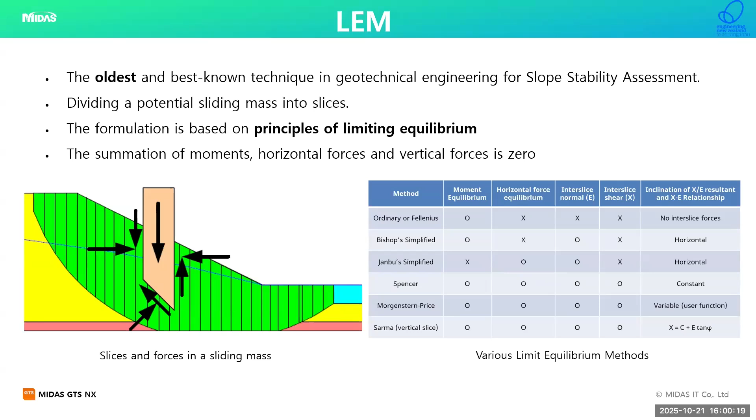So this is very in general about the limit equilibrium approach, and hence it has its own pros and cons. It's very simple to use, and yeah, it has its fallbacks. And when it comes to FEM, all the things that we are dealing with in LEM, wherein the introduction of a slip failure surface or cutting the failure surface into slices, is no longer valid.

Here, they deal with the strength reduction method or the stress analysis method. So here, as you see in the picture at the right bottom, that's the Mohr-Coulomb failure envelope. For the initial state of the soil, the thick line is where you can see the initial Mohr-Coulomb failure surface. So for the in situ stable condition, that's how the failure envelope would look. But as it comes near failure, it touches the Mohr circle where the failure begins.

And that's what this strength reduction method or FEM technique does. It keeps on reducing the strength, c and phi, until it finds a failure surface. That's how simple it is. And that failure surface as a result could be a circular failure surface, a planar failure surface or a wedge failure surface, depending on the topography, the input material properties and so on.

So that's the idea. It has the ability to consider all the equilibrium conditions because it's FEM in nature. Since FEM can consider all the equilibrium conditions, compatibility equations, boundary conditions, and all the constitutive equations, that's the important part here. Most of the LEM approaches or methods are limited to elastic material.

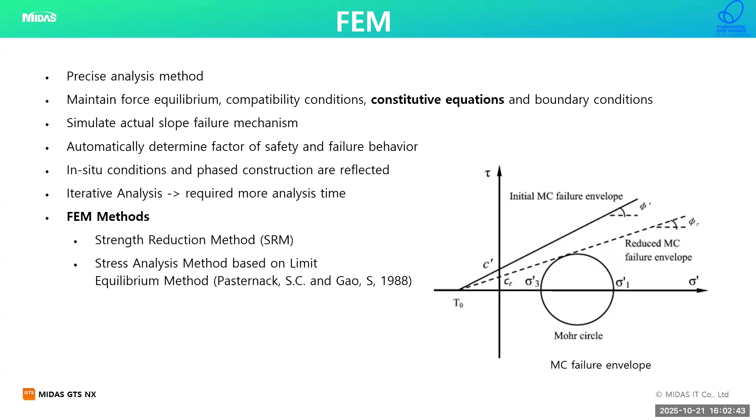So it is a precise method, and it had its own limitations until the previous generation, because it was a highly computationally expensive thing and could only be used for important projects. But all those myths can be overcome. That's what I wanted to talk about as well. The myths are: FEM is too complex, use it only when we have a complex job, and it takes too long for small jobs. But that is not the real case.

Modern tools like GTS NX are user-friendly and intuitive, which makes FEM a go-to tool. There's no need to only consider FEM for complex jobs; you can use it for small jobs to complex jobs as well. And since you consider the boundary conditions that may exist on site, the compatibility equations, and the constitutive equations, it helps to reduce field trials that you may end up having after the initial trial from the LEM methods. So it helps to reduce field trials and errors.

And computation has significantly increased. With the advent of the GPU, as well as multi-core and multi-CPU, computation has significantly advanced over, I would say, the last decade. So FEM can be a go-to tool.

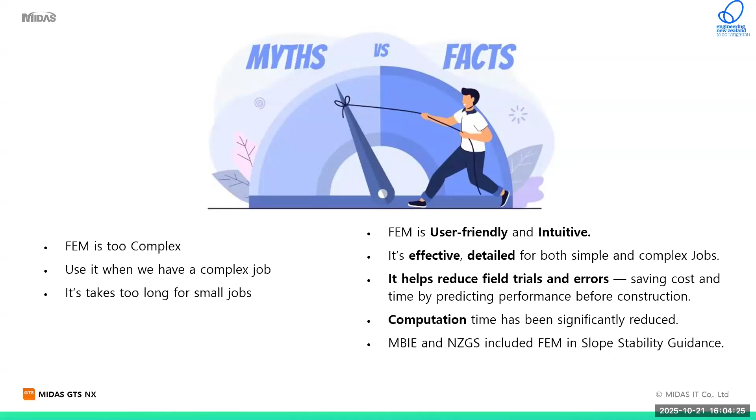And according to MBIE, the Ministry of Business, Innovation and Employment, and NZGS, they have included FEM in their slope stability guidance in the October 2024 draft. So it is set to be released, I guess. So these are some of the myths, and the fact is, you can go with FEM very frequently, for small to complex jobs as well.

I wanted to highlight some limitations that we have with FEM and how we can deal with them in FEM as well. So a comparative study has been made. I created a very simple slope. We have dense soil, the bench is around 45 degrees, cohesion of 30 kilonewton per meter square, and friction angle of 36 degrees. The elastic modulus was wrong over there. The elastic modulus that I considered was 50,000 kPa.

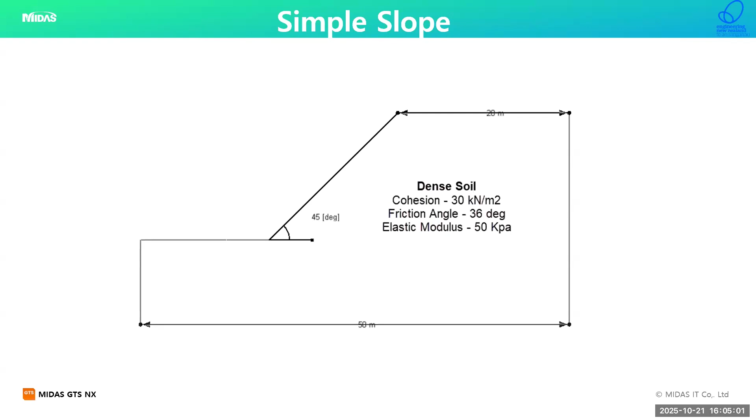So this is the simple slope for the comparative study I created between LEM and FEM. What we found is, in the case of LEM, the factor of safety was 1.78. And nearly the same was found in FEM as well, 1.77. The strength reduction method has been applied.

So the idea is, for a very simple slope and a uniform soil throughout, you would end up having the same failure surface and the same factor of safety, which is not a concern at all, right? Both approaches are giving the same onset.

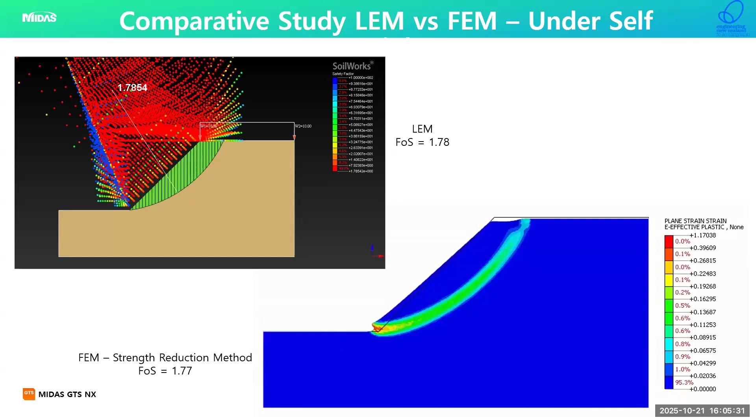And even during earthquake assessment, wherein in this condition I had considered the pseudostatic assessment, the horizontal seismic coefficient as well as vertical seismic coefficient has been provided. For this, I had considered the PGA of the Kaikoura earthquake, so it's 0.22 g, and the horizontal coefficient has been considered as 0.5 times the PGA, which comes to 0.5 times 0.22. And the vertical coefficient was considered as 2/3 of the horizontal coefficient. So that is what was considered in this assessment.

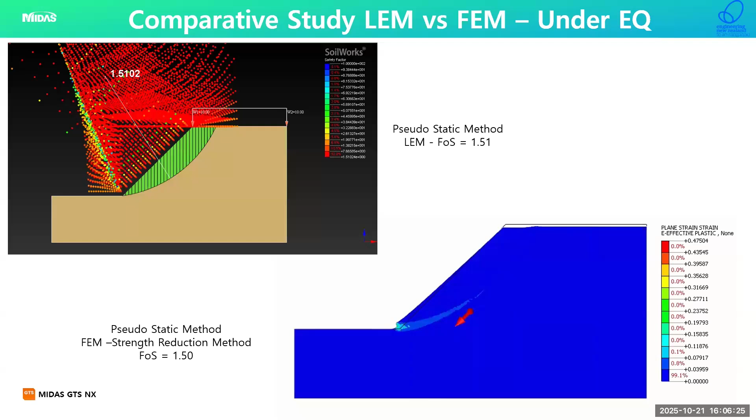And we end up having almost the same result for the limit equilibrium approach as well as the finite element approach, because the soil has been uniform. It is the same thing that you would find in uniform soil and a very simple slope. For a very simple slope, FEM and LEM are providing not exactly the same, but similar results. But what if we have complex slopes with multiple soil strata?

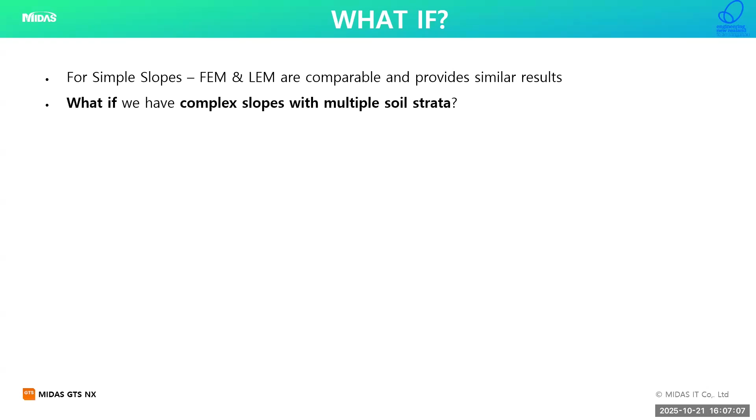Sometimes there might be a very thin layer which is liquefiable in nature, and that is providing a challenge for the engineer who might be dealing with a pile foundation, or with slope stability. So a thin layer could be a very important concern for many engineers. So what if we have very complex slopes with multiple soil strata? Is LEM going to be helpful there? We will check it out.

Also, if you're dealing with soil and fractured rock, it is explicitly needed to model it, or at least to consider the rock mass properties. So is LEM going to be helpful for that? We'll find out.

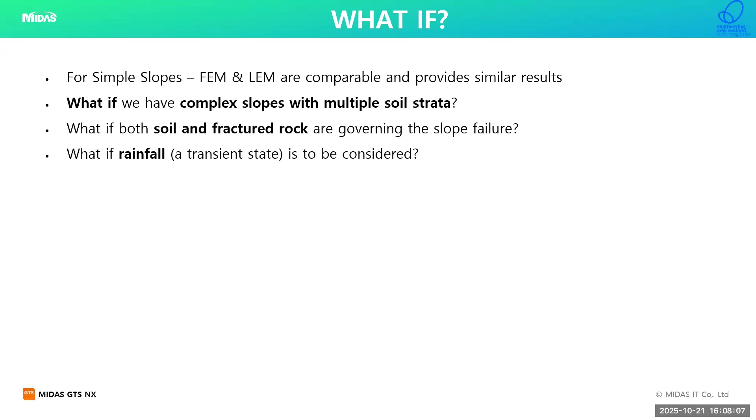And what if rainfall, a transient state, is to be considered? The regular LEM approach considers the steady state condition. Of course, we run the seepage assessment in the transient, but at the end of the day, we take the final steady state condition to the LEM analysis and run the slope stability assessment. But you have a transient condition that needs to be considered at regular intervals. You would like to find the factor of safety because the stress state changes due to the rainfall. So how is it going to affect the stability of the slope? This is one more thing.

And what if you have cyclic movement during the earthquake? During the earthquake, since it's sloping ground, there will be accumulated displacement because of the cyclic movement of the ground. Is it possible to consider in LEM? It's not, because you would not find displacement in any LEM approach. It just provides you the factor of safety and the probable failure surface.

So earthquake-triggered lateral spreading and liquefaction need to be considered as well, right? Lateral spreading and liquefaction are governing things here in New Zealand. So we need to consider FEM for this, because in LEM there are many assumptions, changing the material properties via various empirical equations to understand the effects of lateral spreading and liquefaction in the slope. So again, FEM will be a better approach. We will see what we have in our pockets for considering all these in GTS NX, which is our geotechnical product.

How about multiple shear failures or progressive sequential slip surfaces? In reality, let's say you're dealing with volcanic ash, there is a lot of rainfall, the phreatic surface has increased dramatically and you end up with a fully saturated condition. The failure surface may no longer be circular. There will be sequential failing, one failure surface followed by another and so on, a progressive development of the failure surface, which can never be considered in LEM. That's where FEM can be useful for sure. So let's check some of it.

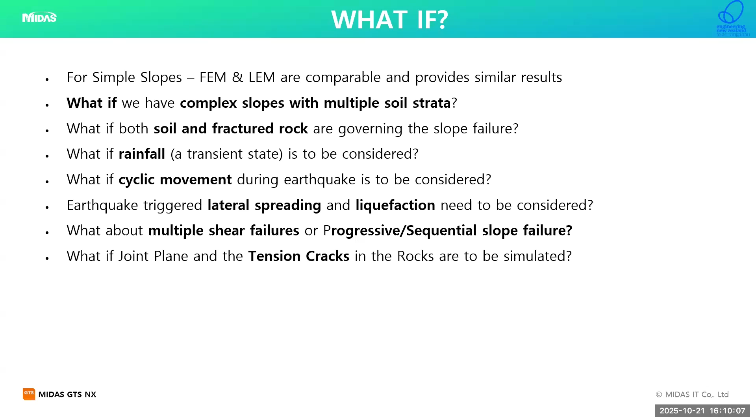And also, what if joint planes and tension cracks in the rocks are to be simulated?

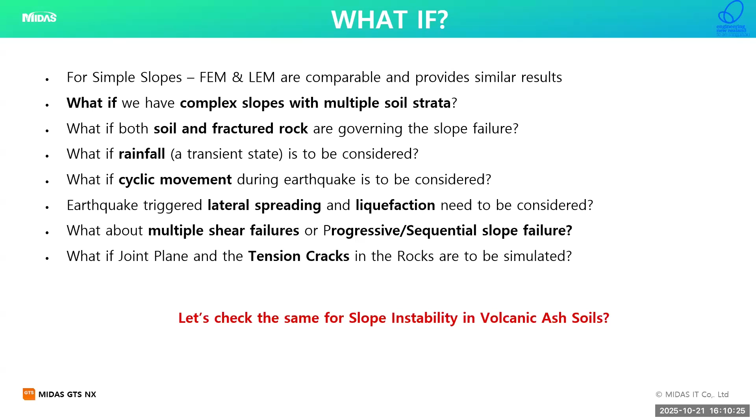Yes, again, FEM could be helpful in this regard. So let's check the same for slope stability assessment in volcanic ash soils. This has been taken from one of the recent projects from one of our clients, so I would like to thank him for providing the data.

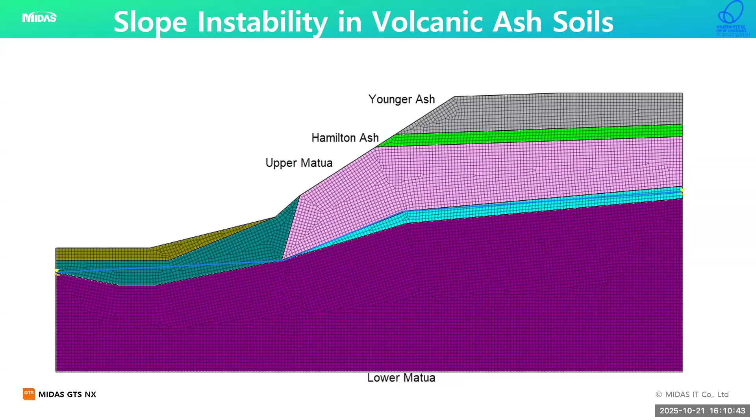So let's talk about this particular slope. We have Younger ash and Hamilton ash, upper Matua, lower Matua, and we have a weak layer in between. This is the soil strata as well as geology that has been considered in this study. If I go with just the self-weight of the soil and find whether the slope is stable or not, I end up finding LEM to be not stable. So you are finding the factor of safety less than 1.

So it is unstable. But of course, when I go with the FEM approach, I end up having a factor of safety of 1.23. This is just under self-weight, no rainfall, just the initial water level condition. And you can see the initial water condition, which is well below the sloping ground.

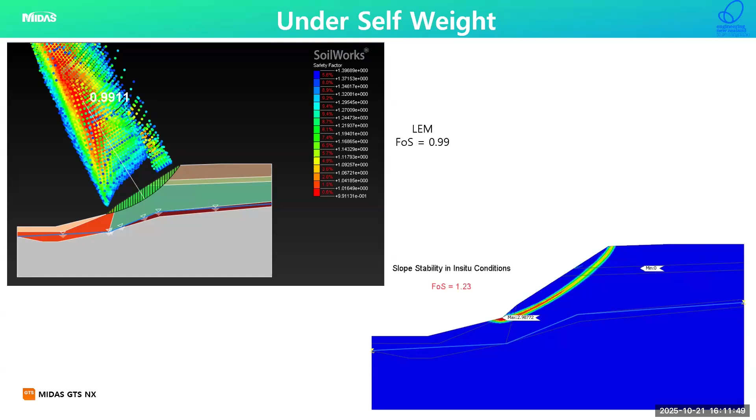Here, there might be a lot of reasons for the increase in the factor of safety. The reason could be consideration of the plastic nature of the soil, or consideration of the iterative scheme of the nonlinear solver in the FEM. There can be many reasons, but the idea is the factor of safety is not the same as the factor of safety that we find from the LEM approach. So we have the factor of safety of 1.23 here for the complex soil strata that we have now.

And how about the rainfall? The interesting thing happens here. Because of the rainfall, the initial water level, which was well below the ground, is now almost reaching the ground over there. In the picture on the left top, you can see that raised water level due to the rainfall. The rainfall was applied on that surface as a boundary condition, so the transient condition was considered in this case.

Due to that, when I run the slope stability assessment, I was able to see multiple failure surfaces getting generated. You can see the failure surface at the toe or the face failure on the top, a circular failure surface generating in the middle, and a bigger failure surface passing through the thin layer over there.

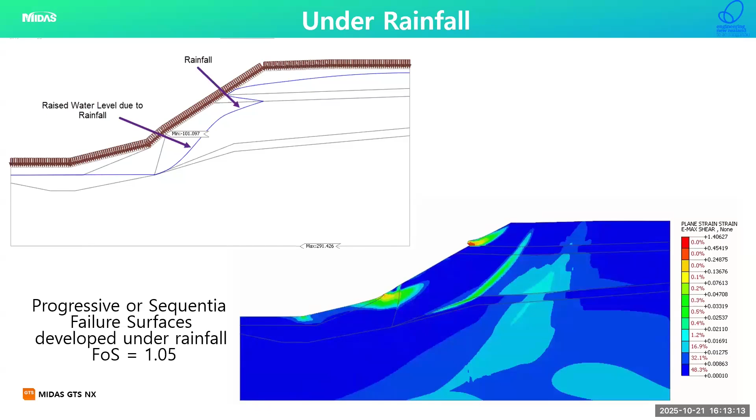All these things can only be considered in FEM, because you are able to find the progressive or sequential failure surfaces which develop due to rainfall, and the factor of safety over here is 1.05. So under self-weight it was 1.23, and under rainfall it is now 1.05. So it has been reduced, which is an important fact for volcanic ash soil, because as and when volcanic ash soil becomes saturated, it starts failing.

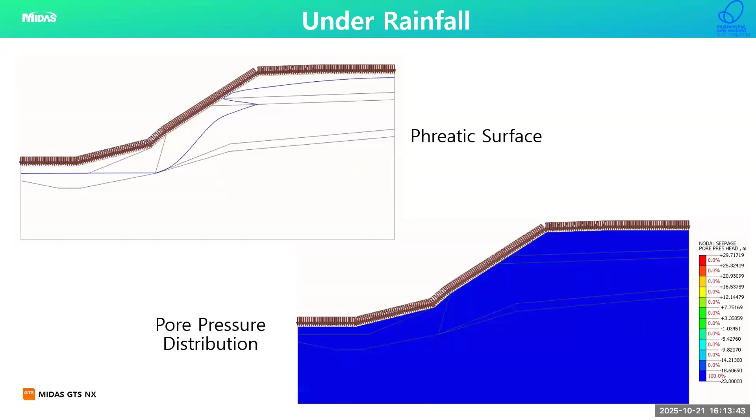And this is the pore pressure distribution that you would find in FEM, because of the seepage assessment and how that seepage is going to affect the stress condition. The increased phreatic surface is on the left top, and the right bottom is the pore pressure distribution. You can see the pore pressure distribution varies significantly throughout the slope because of the topography, rainfall and infiltration properties, permeability, hydraulic conditions, basically.

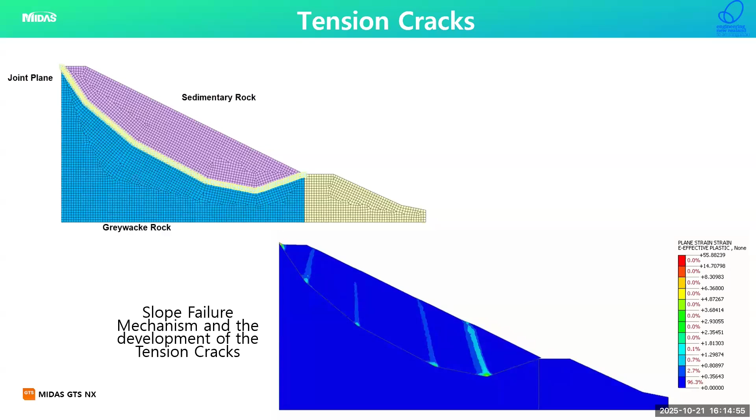So coming to the earthquake, seismicity is a very important part in New Zealand. And most of the times we end up dealing with the pseudostatic method for the slope stability assessment here. So from the pseudostatic assessment of this very simple slope that I had carried out, in LEM we found like 1.5.

But again, sorry, in FEM, considering the strength reduction method for a pseudostatic method, I found the factor of safety to be 1.5. But instead of considering the pseudostatic method, how about considering the time history assessment? That means you're considering the entire ground shaking. So again, New Zealand guidelines ask you to go with shaking whenever it is needed. So ground shaking analysis needs to be considered, again up to the geotechnical engineer's interpretation and discretion.

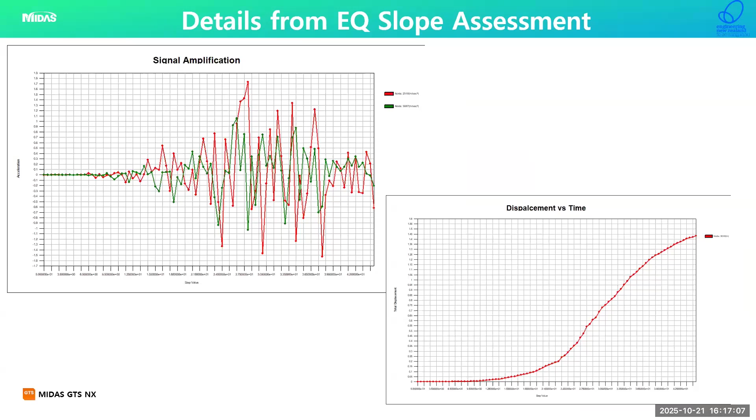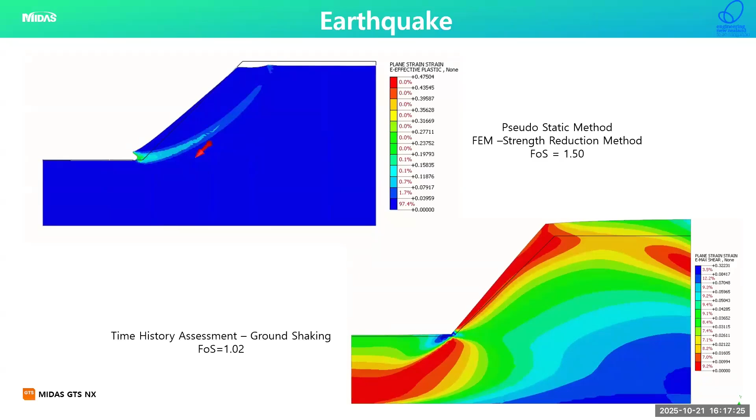And yes, the result is the factor of safety reduced from the pseudostatic assessment of 1.5 to the ground shaking assessment of 1.02. So this is, again, one particular study wherein time history has its own implication, and it is necessary at least to consider for the important structures. So that's in general about the challenges, what kind of failure mechanisms we could find in slope stability, and how FEM can be helpful in that regard.

Now I would like to talk about the solutions that we have in our pockets, which is GTS NX. It could be helpful for both large and small slope stability assessment. So let's see what we got. So initially, as I said, LEM is an important part. And this package, GTS NX, can help you with LEM analysis and FEM analysis, both 2D and 3D, under one platform. This is very important because even if we want to go with FEM, it is always needed to start with LEM, right? So LEM is like an initial step.

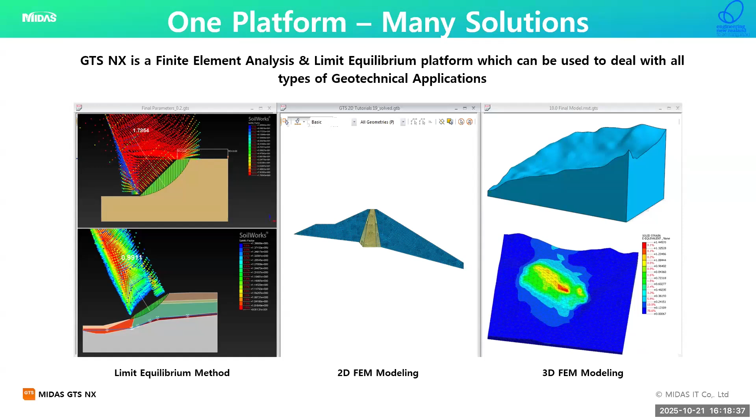You understand the behavior, you understand what the failure surface is, the corresponding factor of safety, and where it is exactly happening. And it is better to assess it with FEM depending on the nature and the requirements of your project. And thereby you will end up doing either 2D FEM or 3D FEM. And you can do everything under one platform. That's the important point. No need to get into different licenses, just one platform, all the approaches.

And the other thing is, in the case of soil, construction sequence is very important. It is the case with every other project, but it's much more important in soil situations because soil is a highly nonlinear material, right? So because it is a highly nonlinear material, as the stress changes, that means as the construction sequence changes, its behavior changes, and thereby the nature of the soil could change from elastic to plastic at any given point of time, depending on loading or unloading situations happening in the site.

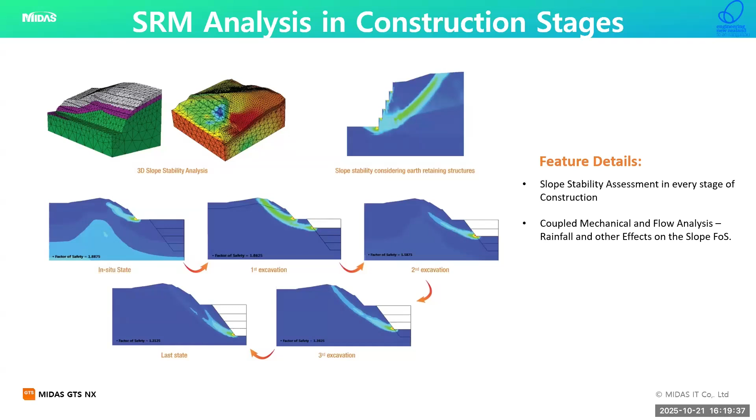So in this software, of course, you can consider all the construction sequencing, and you will be able to find the factors of safety and the failure surface for each and every stage for a particular local assessment or a global assessment. Yeah, this software offers you the SRM for construction sequencing as well, or the slope stability assessment for construction stages.

And the next thing is, now, yeah, we are able to find that the slope is unstable. So how do we go with stabilization? There are various ways, like you can deal with soil nails, rock bolts, piles, or maybe geogrids.

So geogrid, again, has been becoming more abundant for slope stability assessment. So yes, we can provide geogrid in this software. The important thing is, geogrid, being a tension-only element, has to be implemented in such a way that it should be able to only take tension, no compression at all. So instead of modeling the geogrid as elastic material, it should be modeled as a tension-only material, wherein it can only take in tension, and thereby you can see how the factors of safety are changing because of it taking only tension, and you will end up finding what is the axial force coming in the geogrid.

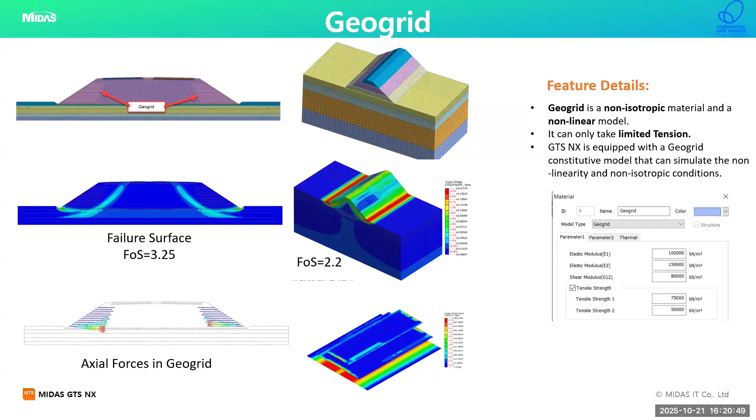So if that axial force, basically the tensile force, is greater than your manufacturer criteria or not, we can end up having an idea, and then we could see, okay, geogrid is not failing or failing. Yes, so we have a geogrid which is a non-isotropic material and tension-only material present in this software for stabilization of the slope, or even MSE walls as well.

And another approach I was talking about initially, right? So the other approach in FEM is the strength analysis method. It's a kind of hybrid method. It was developed in the late 1900s. What happens over here is you're still dealing with the slip circle surface, but instead of considering the Bishop method, Fellenius, Janbu, Morgenstern-Price, and so on, it considers the FEM approach for calculation of driving and resisting forces. So it's one of the interesting approaches and has been getting popular nowadays. And yes, we have had this approach in this software for so long.

So you can still consider the slip circle surface. You can provide the area of interest that you want to analyze, and you can still consider the plasticity nature of the soil because you're dealing with FEM analysis.

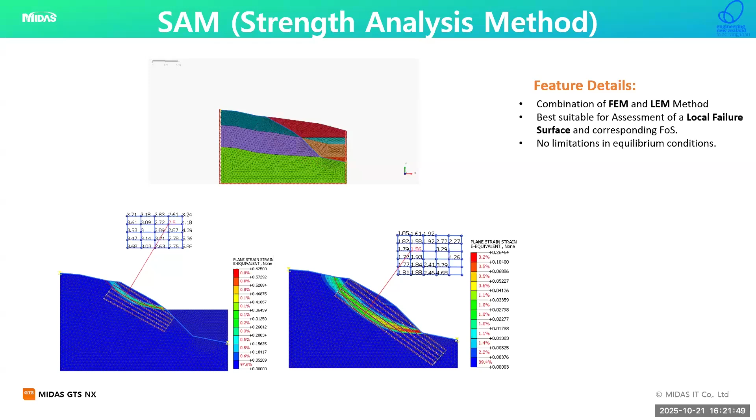And the important part in New Zealand, again, we need to consider the seepage effects, which could be related back to your rainfall. So it is needed to consider rainfall, and how the rainfall is going to affect the stability of your slope, and how your slope factor of safety is changing. So here is one example. Without seepage, you're finding a factor of safety of around 2.45, but with the seepage effect, you can see a factor of safety of 2.1.

This is the earthen dam situation. On the upstream side, you have the water level. Because of the water level, there is hydrostatic force working on the dam. And because of the seepage movement from upstream to downstream, you can find the failure surface developing only on the downstream, not on the upstream side. If you are doing a rapid drawdown condition, there is a possibility of finding the failure surface on the upstream side as well. Both can be assessed in the same software, but it has to be integrated with flow and mechanical behavior. So we have an opportunity to consider flow and mechanical coupled analysis using this software.

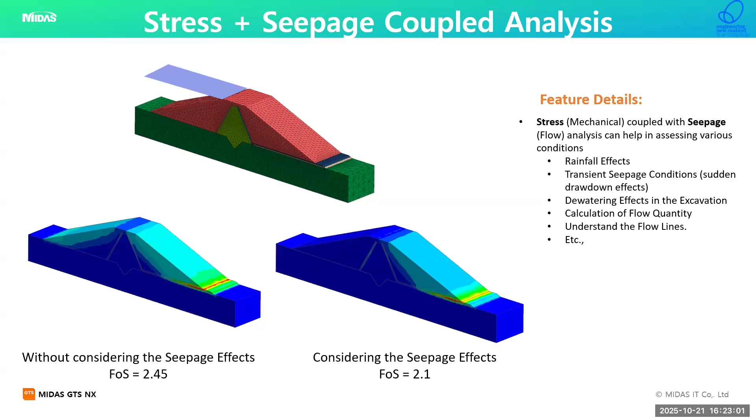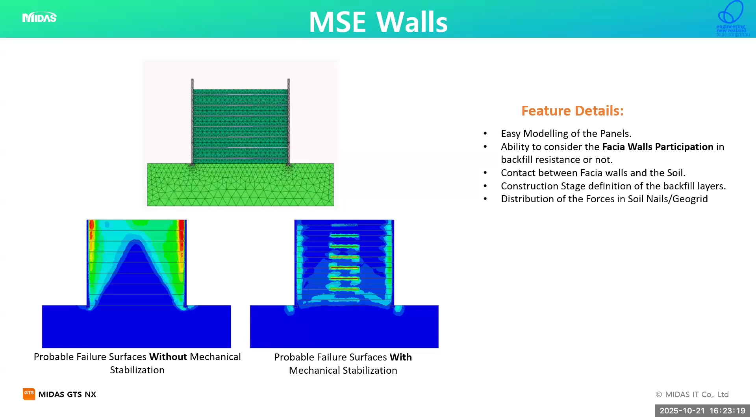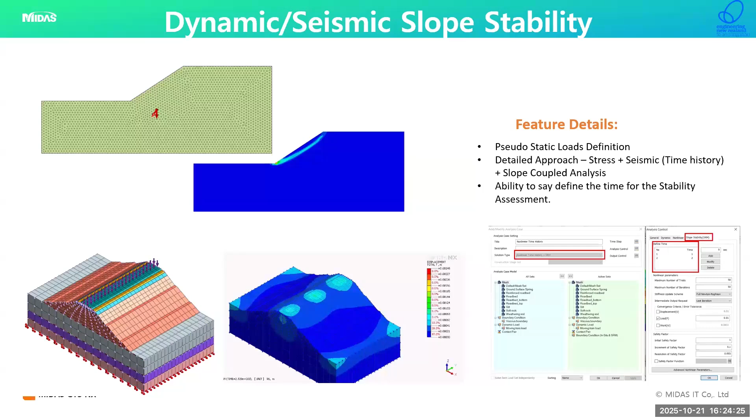So you can let the software know at what point in time during the earthquake to assess the stability of the slope. This is one interesting thing wherein it could be applicable for any kind of slope, and not just seismic load, but you can apply it for other kinds of dynamic loads like the train dynamic load here. The train is moving and you see how the embankment failure is happening. So not just seismicity, but other dynamic loads can also be considered.

And liquefaction, again, an important part. In the case of liquefaction, the pore pressure development and at the same time how the shear stress reduction is happening, that is important.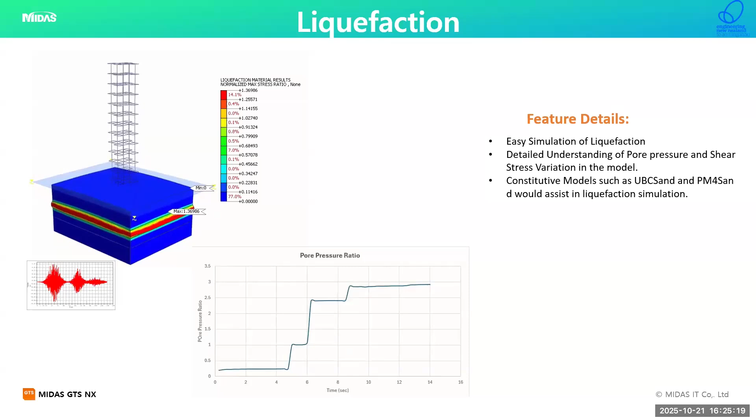So it could be of any condition. So you can assign all these materials and ask the software to assess the slope stability at any point of the time. And consolidation plus SRM: since soft soil is also predominant in New Zealand, consolidation and long-term settlement might be very important in many parts, maybe for motorways or embankments and different situations.

So we can model the consolidation, and we can also go with the ground improvement and see before and after effects of consolidation on our ground improvement techniques on the embankment. So you can see what is the failure surface and the factor of safety before and after ground improvement on the embankment. So even this kind of situation is possible in this software.

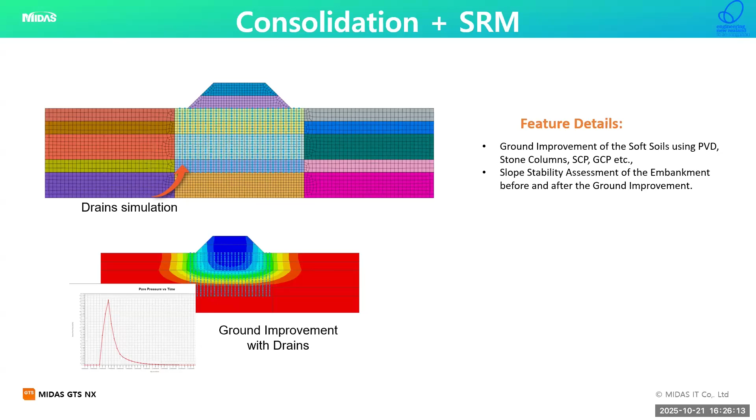So to do all these things, we need to have proper modeling tools, right? So you wanted to create a simple slope. Yeah, you can directly create it using the AutoCAD-related functions in this software. Otherwise, let's say you wanted to create a 3D slope. So we have many features for creating the terrain model for the large slopes.

So suppose you're dealing with hilly terrain, you can take the contour data or maybe LiDAR survey data, so the elevation data, that can always be converted to a surface, which is a terrain. And later on, you can always import the borehole data to get the soil profile or strata developed in this software easily. So previously, again, modeling is the important part, but it takes a lot of time initially.

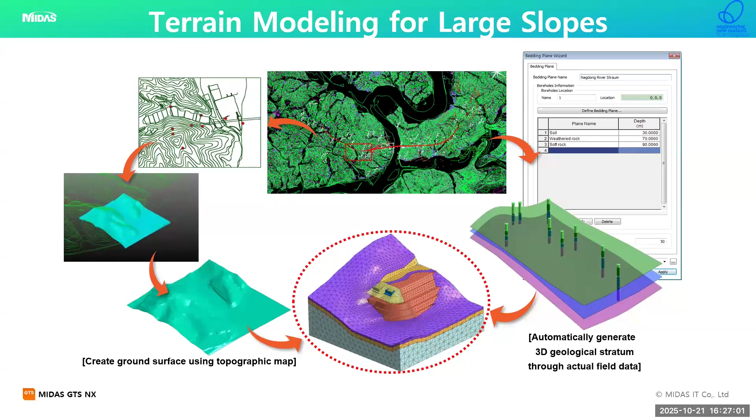But due to the advancements in the modern tools, the modeling has been made easy. And at the same time, the computation has been increased. So yes, it will take a greater time when you compare with other LEM tools, but very less time when you compare with the previous generation of FEM tools. And of course, instead of just contour data, you can take the LiDAR survey or elevation data and convert that to a surface, and that can be taken back to a 3D model.

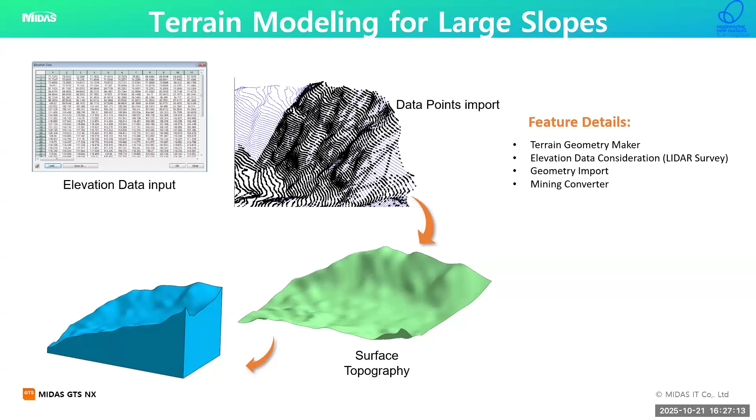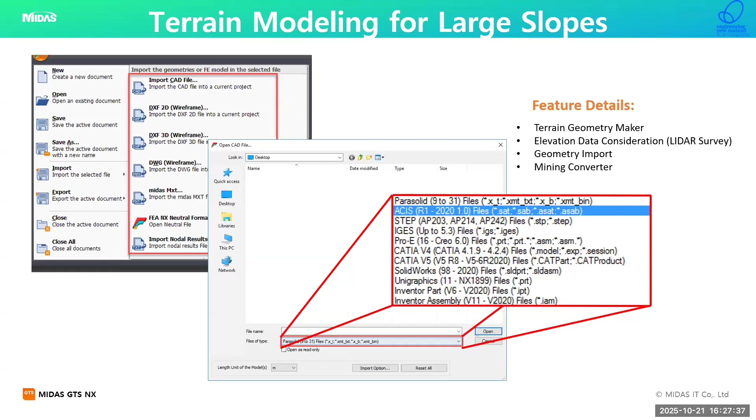And instead of modeling, you can always import all these files. So every other consultant might be using different software. Some might be using Leapfrog, some might be using Civil 3D, some might be using other software. You can import all those models here. Thereby, you will be able to create the assessment for slope stability or any other profile. So we have all these options available to import various model files.

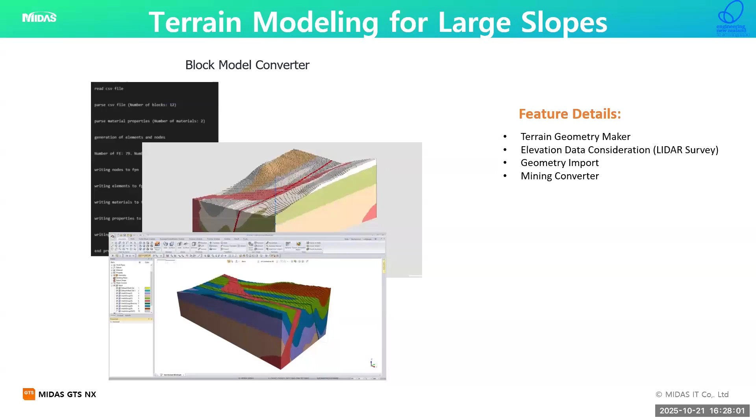And if you are dealing with a block model, even the block model can be input as a direct mesh. You can completely ignore the modeling definitions of geometry. Simply import the block model, which will help you out with the creation of the direct mesh in this software. So even this kind of interoperability is present. And of course, this can be helpful for landslides. So once the 3D model is developed, you will be able to create this kind of landslide assessment.

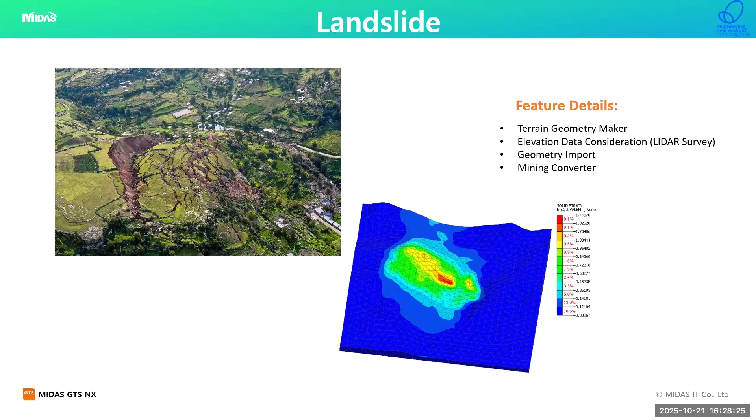So instead of simplifying this slope to a 2D model or a 2D profile, it's always better to consider a 3D profile in these big, large slopes because the confining stresses are very different in a 3D model when you compare with a 2D model. And lastly, now you went with a 3D model, but when you consider FEM, you will end up having a failure surface in a global area. Maybe that area will be of no interest for you, but you can still consider the local slope assessment.

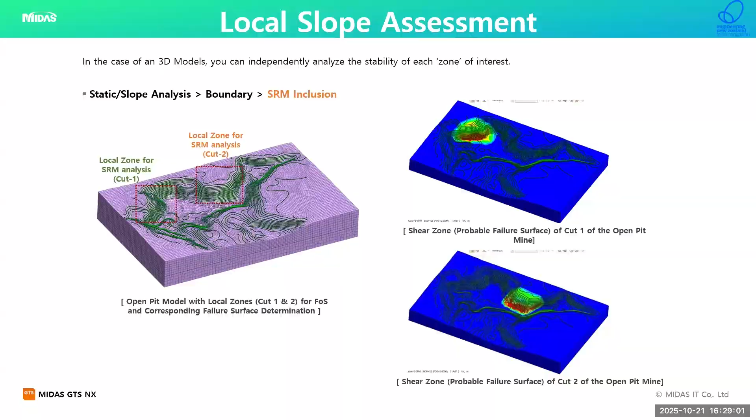You can just select the area of interest, and you'll be able to find the factor of safety in that particular area. So in area 1, you wanted to find the factor of safety. In area 2, you would be able to find the factor of safety. So all these things can be done in a single model; both local as well as global slope assessment can be done. So yes, that's the idea from today's presentation.